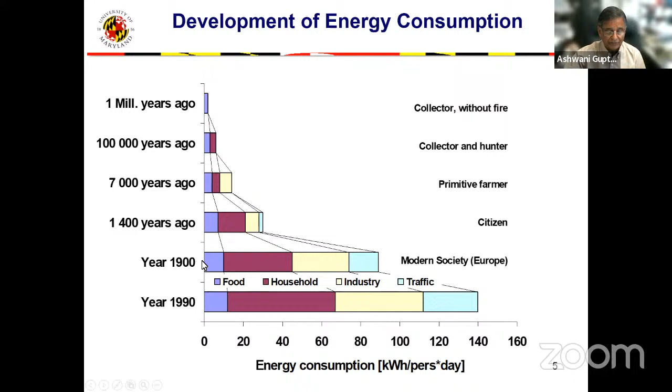So 1990, that's the latest which is available. You can see everything seems to grow, not only for the food area, but also the household industry, and the traffic continues to grow, starting with only a few kilowatt hours per day to almost 140, 150 kilowatt hours per day. So it's growing, which means we need to meet the demand in the various sectors. We can't switch just one sector here to the next sector. So we need to satisfy.

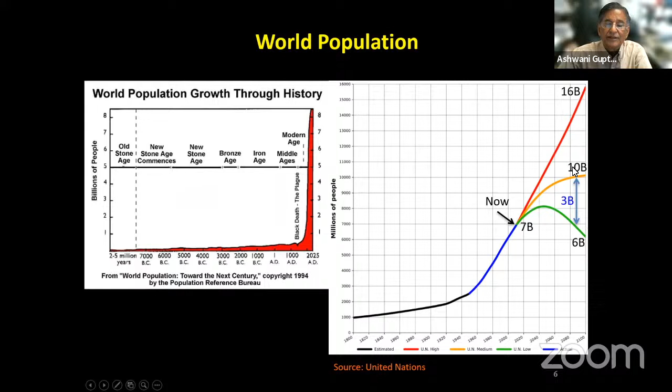So here's a close view of the number of population, where we are and where we're going—roughly 7-8 billion right now. And if the economical scenario stays the same way as we see it, we can see a high trend of going to about 16 billion. On the other hand, the low part maybe about 6 billion, and the medium path is about 10 billion. So given the recent trend, the population continues to grow, and we expect this to grow all the way to about 10 billion by the end of this century, about 2100.

So population is growing, the energy usage is growing, which means we need to bring the energy, and this is where contribution from various researchers, including Professor Yap in Malaysia, is very, very helpful in satisfying the need of the society and the human being to make life comfortable.

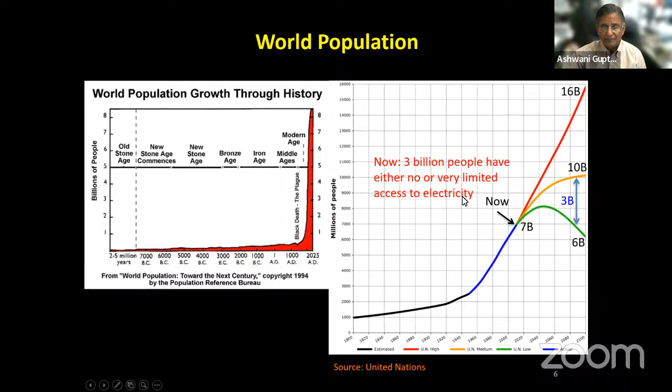So right now, there are about 3 billion people who have either no electricity or very limited access to electricity. I really believe electricity is a very integral part of society, and we need to have availability of electricity for everybody. If you go to countries like Africa, the only thing they wish is that they had electricity, could turn it on, cook the food, have a comfortable life. It will change their life dramatically from what they encounter right now.

So world population currently requires food and fuel supply designed for about 7 billion people. Over the next 50 years, we expect this, as shown in the previous graph, to reach roughly 10.5 billion people worldwide. If you look at the distribution from 1800 to 2100, you can see the developed countries have a relatively small increase in population—a small finite increase—but the developing countries, this is where the major growth will be.

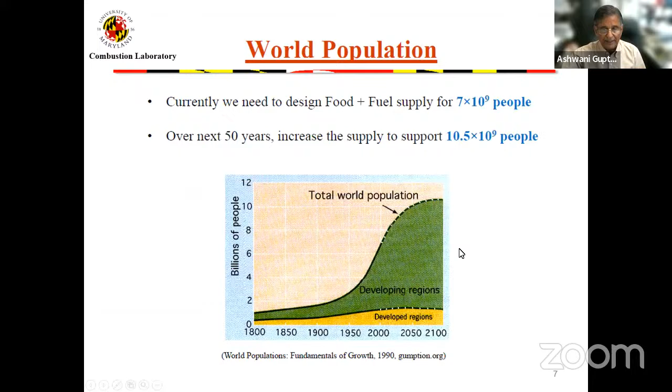Remember the point I made about electricity demand in Africa and some developing countries—this is where the big wish, the big need is for providing electricity for everybody. So the availability of energy, as well as electricity, is not uniform to where we need to see it.

So if you look at the Industrial Revolution, going back in the old time, the horse was our major carrier, and this is not too long ago—just even 1800, you could see horse buggies transporting from A to B.

Where I am, at the University of Maryland, I show the campus where it was. Back in the old time, people used to travel from Baltimore, which is about 25 miles north of College Park where I am, and they'll go to Washington, which is only about 10 miles from College Park. So this was almost a midpoint, not quite, but almost. They'd stop overnight and park the horses near the building and rest, then continue the next day. If somebody is brave, they will continue the journey the same way.

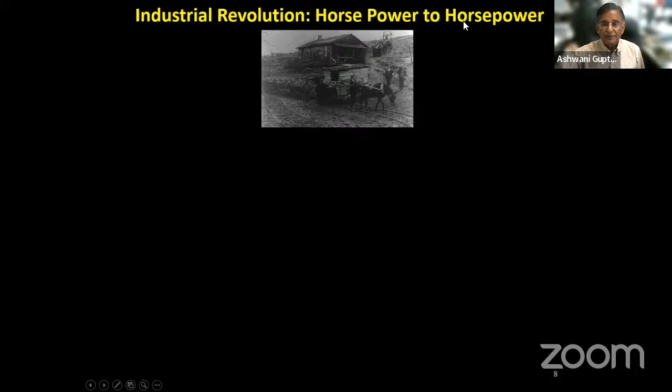So horsepower was the one putting the buggy—a horse is the one pulling it. For those not familiar with horsepower, you can think of manpower: 13 very strong men equal 1 horsepower. That kind of gives you an idea of how much horsepower we're talking about. So horsepower to horsepower is really what we're talking about.

So automobile engine, which we're all familiar with, you can see the automobile over here. I put one of the General Motors cars here, about 300 horsepower. You might say, well, my car is only 200 or 100 horsepower, but that's not the point. I think 1 horse going to about 200 or 300 horsepower, so you can see the order of magnitude, or 2 orders of magnitude increase.

And if you look at the train, from 300 you're talking about 10,000 horsepower, so much larger increase in the power. On the other hand, if you look at the aircraft, and this is the 787, it's 100,000 horsepower. So very, very large increase. In other words, the power which you saw back in the old time with horse and buggies, you can see how much it has increased from 1 to almost 100,000.

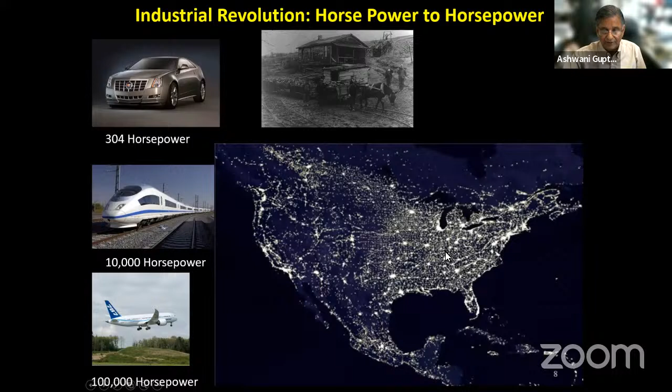And in terms of electricity need, you can see the map over here, and I can share some of the map with how the light is lit up in the rest of the world here. And I'm basically right over here on this corner.

Let me see if I can put the laser pointer here. So I'm right over here, and the eastern part is pretty much lit up, as is the western coast. California, you can see some dots, which is Los Angeles here, San Francisco area, and Las Vegas is just right next to Los Angeles. In other words, the point of the message here is that it's not uniform, and in the northern part you see Canada a little bit lit up.

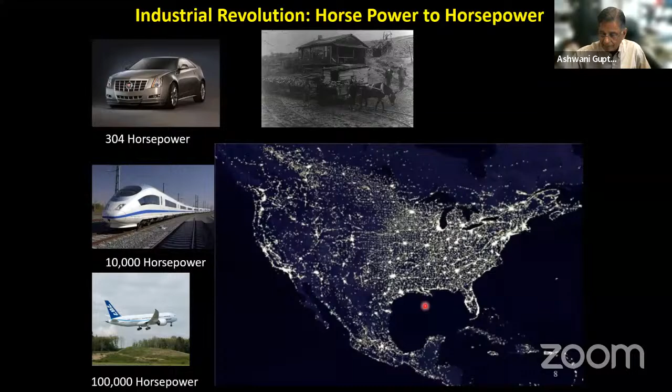So now we come to the feature presentation, which is the high intensity colorless distributed combustion fuel flexibility, something we need to talk about. I was one of the leads in developing this so-called HiTAC technology.

And if you look at how this evolved in the former time, the idea was to make it a bigger and bigger power station. So we have a 50 megawatt power station or 10 megawatt power station. That was the key thing. The goal was how do we actually develop it, and how do we produce the energy from here, and how do we produce the electricity, the electricity production efficiency.

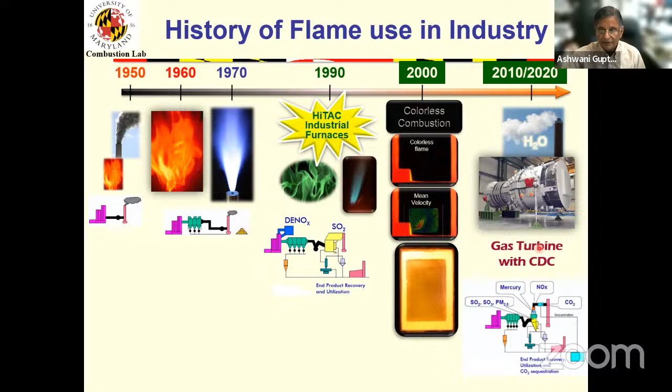So what are the benefits of this HiTAC technology I'm talking about? Some people call it flameless oxidation. Germans call it flameless FLOX burners. I stick to our definition of colorless, because flameless cannot be correct - if you don't have a flame, that means you have no heat and no light. Colorless is more suitable because there's no color, but at the same time you have a flame which is distributed uniformly all over the combustion.

One guy from Italy, who was working in the area of soot particle diagnostics, came up with the idea of calling it mild combustion, which I don't support because it's not a moderate intensity - it's basically distributed combustion. But as you can see, the Germans, the US, the UK, and many other countries have used it, including far east countries like Thailand.

So the technology actually provided significant energy benefits and energy savings in industrial furnaces. Our goal was to have energy savings of about 30%, and I'll show you how much we were able to achieve, as well as the CO2 reduction.

There's also uniform thermal field distribution in the entire combustion zone. I'll show you the actual results. Basically, throughout the entire combustion zone, you can have a temperature within about 30 degrees K. This is unheard of, because in the literature or any combustion book you look at, the flame goes from normal room temperature all the way to about 2000 degrees K.

Here we are talking about the entire combustion zone, from the start of the burner to the end, staying within 30 degrees K. There's also low noise - we've shown almost 7 dB noise reduction. In fact, in some cases, you can't even tell whether the flame is there or not. So that's very favorable too.

Very high heat flux - those in computer modeling will see the typical value they use is about 100 to 120 kilowatts per square meter. Here we had a measured value as much as 3 times as much.

So high intensity CDC, which is more megawatts per cubic meter, and that's really where our gas turbine combustion becomes very, very useful.

So we transitioned from industrial furnaces to gas turbine combustion. We also looked at some of the waste, how do we convert waste into useful hydrogen-rich syngas. We've been using this HiTAC to convert waste into hydrogen-rich syngas. Hydrogen is a premium fuel, so we can clean it up to get hydrogen fuel itself - I call that fuel reforming, because you take any hydrocarbon material and actually convert it to hydrogen fuel.

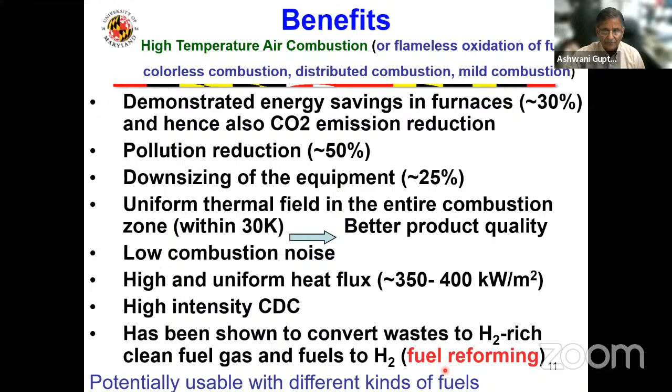So potentially it's usable for different kinds of fuels, and I'll show you some data using different kinds of fuel. Very, very attractive proposition, what we see here.

This is more of the detail, the concept of how it's used here. For industrial furnaces, typical application is less than a megawatt per cubic meter atmosphere. I bring up the atmosphere because that gives applicability across all kinds of application - power application as well as propulsion application. For furnace application, the typical value may be of the order of 0.1 to 0.2 megawatts per cubic meter. On the high end, maybe 0.5 megawatts per cubic meter.

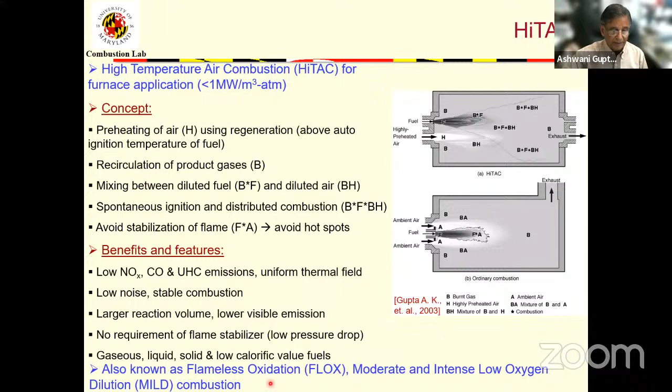As I mentioned, some people call it flameless oxidation, or in German, moderate and intense low oxygen dilution, and mild combustion. The name is attractive, but it's a misleading definition. I would not use 'mild' because it's not mild—there's no real boundary to what we're talking about here.

You can go down to as low as a few percent oxygen concentration. That means you're able to recirculate even the exhaust gases of an industrial furnace back in, and you can still have a flame. It may not be visible, but it's still heat releasing.

On the other hand, looking at syngas, synthetic gas of very low BTU, you can actually burn this in the HiTAC furnace and still get heat release. So it becomes a wide, open area.

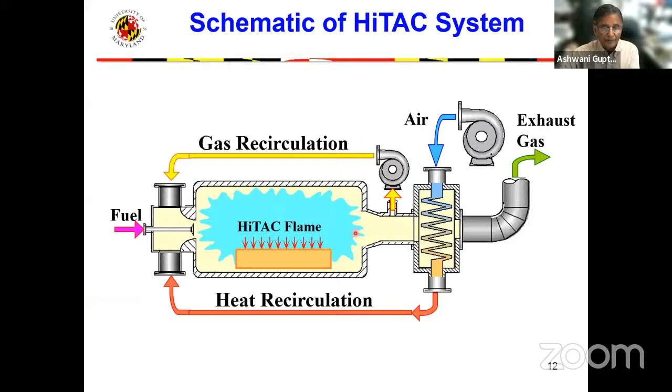How do we do this? Basically through gas recirculation and heat recirculation, which I showed in the initial picture—heat recirculation and gas recirculation bring us to this part here.

This is the one which actually led people in the community to call me Mr. Green Flame. So if you hear 'green flame,' that originated from the University of Maryland—that's where the name comes from, from much higher temperature combined with reducing the oxygen concentration.

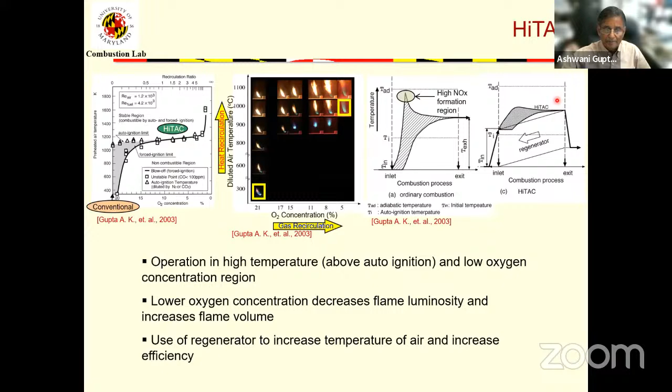On the other hand, we use regeneration at very high temperature and dilute the gases to reach the HiTAC region on the right-hand side. These are the detailed features you see here.

Colorless distributed combustion, or green combustion, is a very novel technology that provides significantly lower pollution—I'll show how low. That includes NOx emission, CO emission, no emission of particulates, no soot emission, no carbon emission, as well as no hydrocarbon emission. The flame thermal uniformity is also much more uniform in distributed combustion, and because of the energy saving, I'm putting less fuel in.

I'm also getting the CO2 reduction in this case. Distributed combustion is featured by controlled mixing of the reactants, where I could have steam to reduce CO2, or nitrogen, or even steam to reduce the emission. So fuel flexibility means that I can use different kinds of fuels, and irrespective of fuel property, I still see the same thing in this case.

So here, in terms of an academic exercise, I'm looking at the turbulence as well as the length scale relative to the laminar flame thickness. The wrinkled flame zone is here, the thickened reaction zone is over here, and the distributed combustion is somewhere in this vicinity, where the Damkohler number is less than 1. The reciprocal of the Damkohler number, the Karlovitz number, is somewhere in that vicinity, so the thickened reaction zone is in that region. The normal spot, with very low Karlovitz number on the order of 1, is more true for the IC engine. You can see the onset or hotspot zone, which gives you high emissions and also unstable combustion. So you see the global feature, and in this region here is the laminar flame.

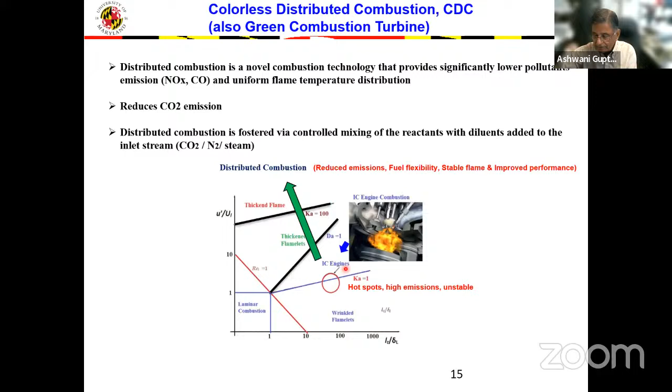So if you look at the Damkohler number, as I mentioned, in the previous case it's about 1, or the inverse of the Damkohler number, the Karlovitz number, is very high. So the Damkohler number is about 1, and this is where the high-temperature air combustion regime sits. On the other hand, colorless distributed combustion, which is more for gas turbine applications, has a pretty high Reynolds number. That's where CDC sits. So CDC is not the same as high-temperature air combustion, and vice versa, but there are certain differences. The common feature is still that we don't see the flame.

On the left-hand side is what you physically see in the normal flame. This is looking at the cross-sectional view of a combustor, and you can see the tinted blue zone over here—that's the diffusion zone. When I introduce this in colorless distributed mode, you can see the whole flame color has disappeared. You might say, well, there's a yellowish or orange background—that's actually from the coating on the material that's glowing. But otherwise, there's no visible flame, as you can see here.

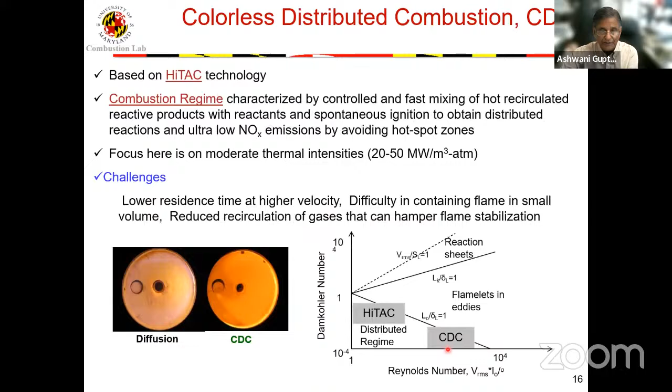So the challenges you see here, when you go to high-temperature air combustion, include low residence time at high velocity, because the velocities are pretty high, meaning we need to control the flame in a small volume. I'll talk about that small volume. Recirculation is important, along with mixing of these gases with the fresh reactants—that's very important. If you don't do this, it's going to impact flame stabilization. So it's all about knowing how we prepare the mixture. If you don't prepare the mixture properly, especially in high-intensity applications, that becomes a very challenging task.

So we started this work in our lab to look at what CDC looks like.

Our quest was to look at colorless distributed combustion, the University of Maryland near-zero emission, fuel-flexible approach, meaning I've used it for different kinds of fuel and still don't see any emission using CDC.

In this example, you see the whole range of combustors here, and the common feature is that we had the facility in which I can introduce the reactants from upstream or downstream, and the exhaust gases exit over here.

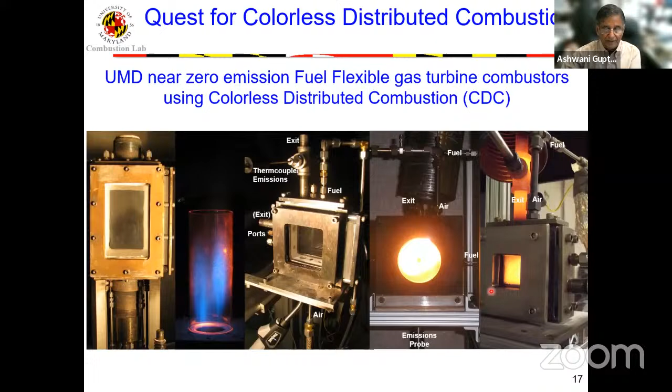That's the picture I showed you, and this one is very high intensity on the right-hand side. You can see the size dimensions going from this volume to about this size, so moving in the right direction to have high intensity and very uniform conditions, with the oxide gases exhausted away.

Basically, gas turbine is what we're using for the CDC, and the goal is to reduce emissions. What strategy can we use, what are the important factors for CDC design, and what has been done in the literature? I'll show you some sample results.

This was obtained in some earlier work at about 0.1 megawatt per cubic meter atmosphere, going to low thermal intensity. In other words, moving toward gas turbines, which are high intensity: 5 megawatt, 28 megawatt, 85 megawatt, and all the way to 200 megawatt per cubic meter atmosphere.

As I mentioned, modern gas turbine applications used for power generation at present are limited to about 15 megawatt per cubic meter. So you can see I am an order of magnitude larger than what is used in current practice for electricity generation.

You might ask how this compares with aircraft. Modern aircraft can go all the way to about 50 megawatt per cubic meter atmosphere, so even compared to modern aircraft, I'm about 3 to 4 times higher than what they have.

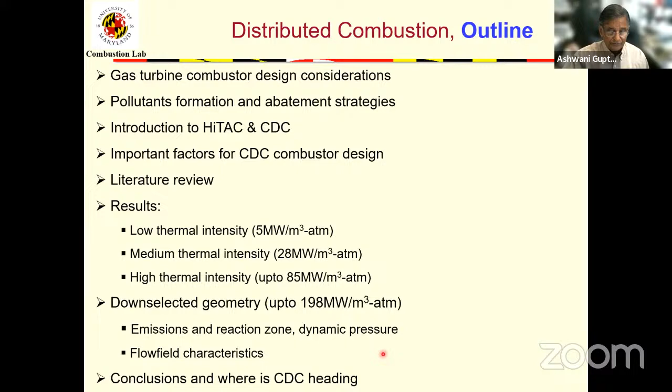A little background on gas turbine combustor design: the design consideration basically requires low emission and very high thermal intensity. As I mentioned, for stationary power application it's 15 to 20 megawatt, and the residence time is 20 milliseconds.

That's a very important factor. The reference velocity for those working in that area is typically about 60 to 70 meters per second. We need very stable combustion, and of course, noise levels below combustion instability.

That's important because that's what gives rise to oscillation, pressure oscillation. We also need low pressure drop, typically less than about 5%, and wide stability limits, with a turn-down ratio of 5:1 for low power to high power. The pattern factor, how uniform it is, is also important for gas turbine application.

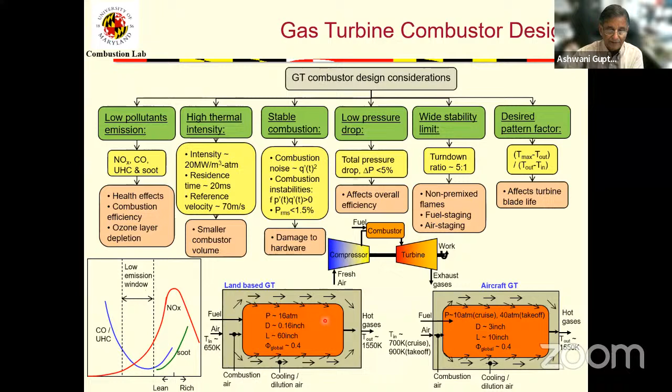In the actual schematic given here, fresh air comes into the compressor, that goes to the combustor, and then to the turbine, which is the output. So it's open-ended in this part here, both for the aircraft as well as the stationary gas turbine.

So what did we do here? We bring the whole thing to the lab and see what I can do in terms of determining what the factors are where we are seeing it.

How am I doing with the time? Time is okay? Yes, Time Prof. wise? Yeah, yes.

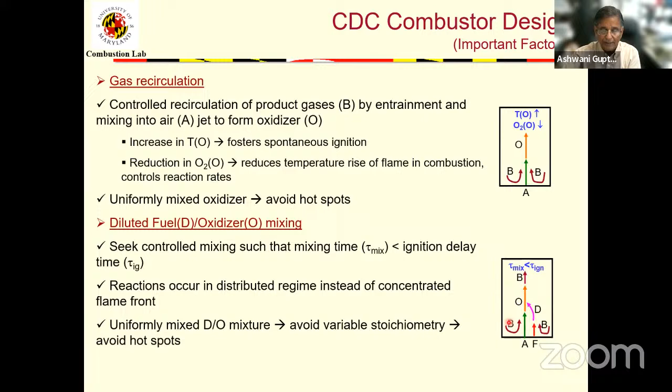So I'm going to dwell on this part here to see what the schematic would be needed and who's done what to achieve the condition we're doing here, because there's no simple relationship.

So here's the same schematic. The air introduced here, burn gases going over here. Now I can take this fuel, either introduce it upstream or impose it in the opposite direction from the burn gases. So in this case, the air is here and the fuel is here, opposite. So FO, fuel is opposite.

In this example, fuel and air are in the same direction, F as fuel, on the same side of this combustor. And in this example, the fuel and air are pre-mixed. What happens if I pre-mix the fuel and air and then introduce the burn gases here?

On the other hand, I can take the air on the opposite side and inject it with very high velocity, letting the gas entrain in this part. Now I can subdivide this, air coming in from this part, and fuel on the opposite side. So the fuel will be entrained after getting entrained from this section to mix with what I want to achieve here.

On the other hand, I can introduce the fuel somewhere in the middle, in recirculated products with the center part here. So I call this RC, and this is the opposite, reverse opposite, reverse central, and reverse same side over here.

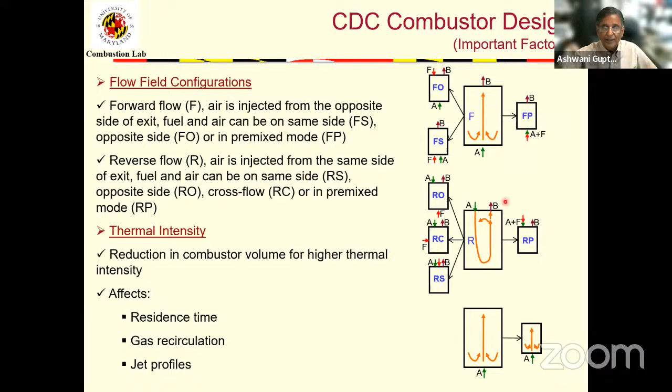Or I can have the reverse in the premix case, where the fuel and air premix and go in the loop. So I had the different schematics, getting the opposite picture here. Essentially, the idea was to look at the matrix and see which one gives the low emission, because that's really our goal. These are the factors we need to obtain in designing this whole thing.

So here's the results for the furnace application, given in thermal intensity. Thermal intensity, as I mentioned, is typically about 0.01, 0.05, or 0.1, 0.5 - anything less than 1 megawatt is furnace application, and anything above 10 megawatt is for the gas turbine application.

So you can see the whole range of work which is done, including Roman Weber from International Flame Research Foundation, some of the other work, as well as my own work done back in year 2000, early 2000, and so on. And you can see the industrial application was the one which we were doing it in conjunction with the Japanese. In fact, I was the international consultant to the Japanese project for almost a decade. And this is where all the work evolved here for the furnace application.

And you can see how much the thermal intensity was and who was looking at this, because that was a dynamic activity back then. And these are the corresponding geometries, which you see it labeled over here, who did what, and what kind of configuration which we did, including the work from Georgia Tech, Bobba, and other work which you did, and was central, how much was done.

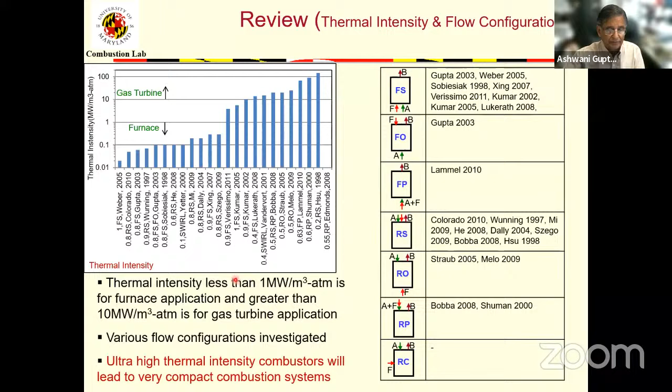So ultra high thermal intensity combustor will lead to very compact combustor. This is what our goal was, to look at the overall configuration. So here's the example of what people did and how much the NOx they were obtained.

So on the left-hand side, you can see where the fuel from the same side, fuel from the opposite side, air from the opposite side. So here the fuel, here the air, same side. And here is the fuel and air from the same side, but it's the reverse direction. In other words, that's the direction which is going in. So here is the air and fuel from the same side, and here the air and fuel, but they are rather separated. So the separation distance is actually very, very important.

And this is what led to, when we probed into a little more in the detail, that the Thring-Newby parameter became very, very important to consider this. And we didn't realize that this was important and how much distance we need to keep.

But the bottom line is that the studies which you see it, much of the studies were at atmospheric pressure, because that was our goal, and to apply it for the furnace application. And you can see the heat load was only about 500 kilowatt, or 20 kilowatt in our case, and 50 kilowatt in our case.

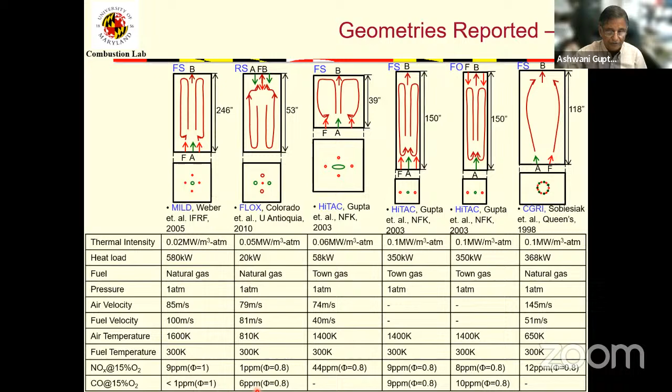And incidentally, 10 ppm, you might think it's a high number compared to what other people have got. In fact, we got even smaller than this, but that's just to say, what it reveals is that the geometry, configuration, how you introduce the fuel and air are important bearings on what the NOx emission you're going to see it. So you can have anywhere from 1 to 10 ppm of CO level in different configuration.

There's more of the similar kind of data with the other investigators all around the world, which they did. And you can see much of the data is atmospheric pressure and the air velocity going from 20 meter all the way to 100 meter per second. And the fuel is atmospheric temperature, air is atmospheric temperature.

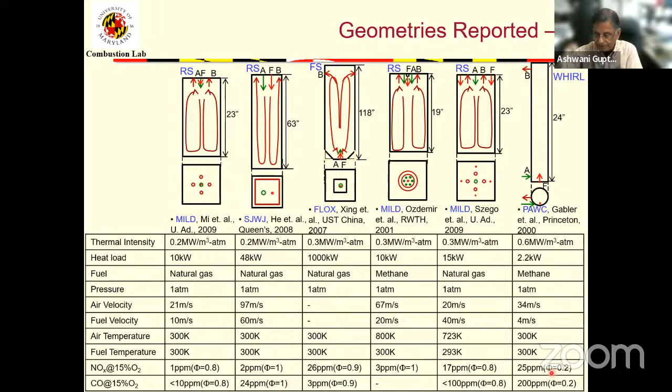And the NOx level, you can see the equivalence ratio, even at stoichiometric mixture or near to stoichiometric, you begin to see you can achieve 1 or 2 ppm. And CO level 10 to 20 ppm. That was a very, very high achievement, which was never demonstrated before in the history of burning of the fuel, which you see it here.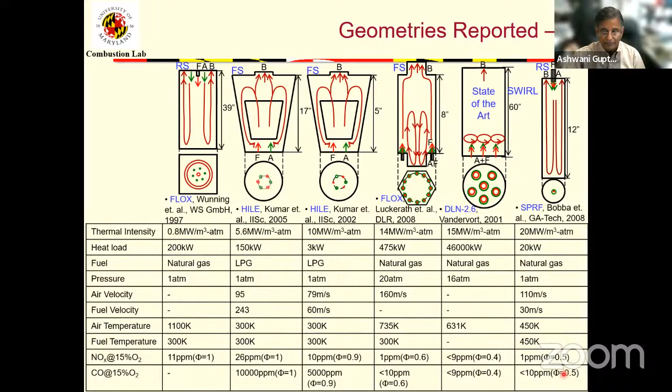So that gives the very favorable condition to where we need to go. Some more geometries here, practical application, reaching the condition where you can get the NOx level anywhere from 1 or 2 ppm going all the way to 30, 40 ppm, along with the CO level. So it was a major, major achievement.

NETL, National Energy Technology Laboratory in the US, did this, and they were actually able to show that you can get sub-unity ppm NOx level.

AFRL, again in the US, and Technion and NETL in the US, worked on what was more of the rich quick burn, lean burn, and trap vortex combustor. They thought that was a good way forward to reduce the NOx level, but you can see the NOx levels were pretty high, 40 ppm, and CO levels were still 10 ppm.

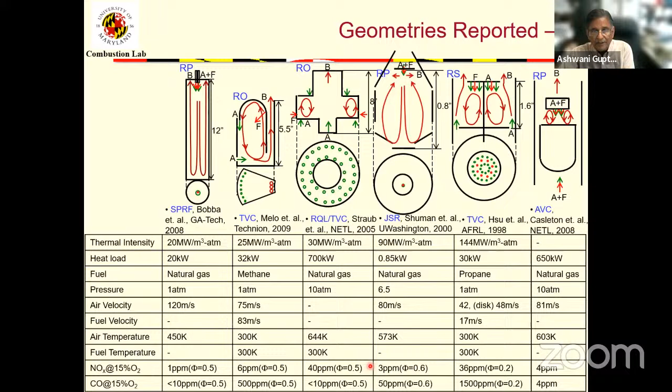So that was the dynamics of where we go. This is a summary of the different configurations, which we summarize in a nice way: forward same side, forward in the opposite direction, for fuel and air. In the premix case, this is what you get.

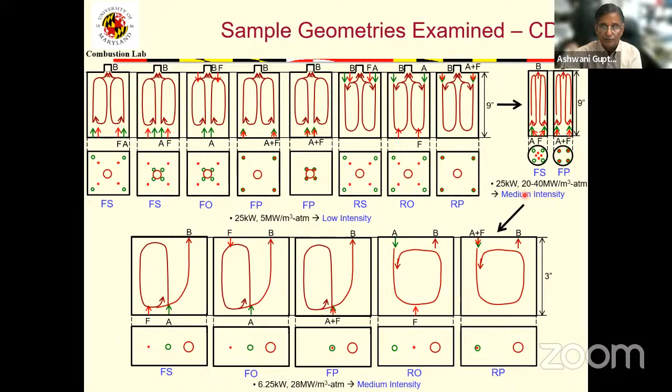We did some CFD simulation to see what exactly it looks like. Unfortunately, I don't have time to show all the data, but nevertheless, we configured something that can go from low intensity to moderate intensity to very, very high intensity, 20 to 40 megawatts per cubic meter.

You can see the NOx level going from 4 ppm down to about 1 ppm at an equivalence ratio of 0.5. You might ask, what does 4 or 5 ppm actually represent?

Remember, I said that the gas turbine combustor in stationary power applications typically has an overall equivalence ratio of about 0.35 at normal setting. So even richer than what's normally used, you were able to see the NOx level at about 4 or 1 ppm.

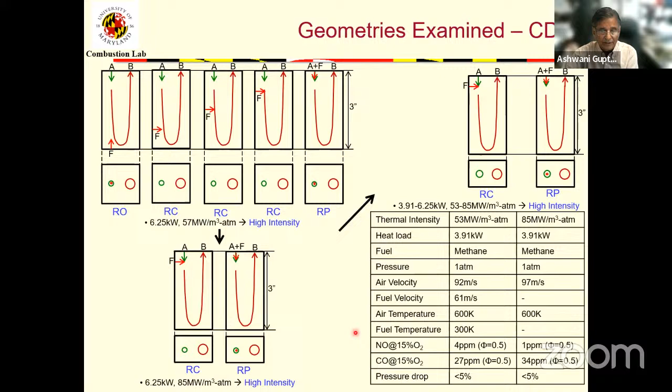That was actually very good, and these are different kinds of fuels. I didn't go into what kind of fuel you're using, but we've been using methane, propane, and some of the syngas which we're producing here.

So this is basically a summary of our University of Maryland results, some sample results you see here. We did all the way from 5 megawatts per cubic meter atmosphere all the way to about 200 megawatts per cubic meter atmosphere, and you can see our thermal intensity results and how much emission you see here.

You can see the NOx emission in some cases as much as 10 to 12 ppm. In other cases, we're seeing the NOx level in only single digits, 1, 2, or 3 ppm. The configuration determines what is low and what is high.

On the other hand, the CO emission in most cases is about 10, 20 ppm, and in some cases as low as 4, 5 ppm. This was a major, major discovery in terms of how we actually reduce emissions. And of course, soot and carbon didn't exist, and hydrocarbons didn't exist in any of the features we're presenting here.

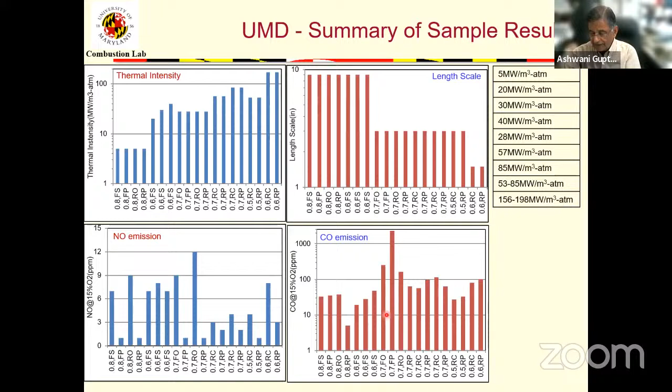So I'll go into some more detailed effects you see here: the effect of air and fuel injection, what diameter we need to have. That gives the way and means of how we inject it.

You can see at an equivalence ratio as much as 0.9, essentially stoichiometric condition, having a NOx level at 15% O2 down to about 6, 7 ppm. That was a major, major achievement.

You can actually even reduce it further at 0.9 equivalence ratio, near stoichiometric, with NOx levels as low as 5 or 6 ppm. Same thing with CO at equivalence ratio 0.7, which isn't quite what's needed in the gas turbine combustor, but people wish they could go as high as 0.7. The reason they don't go to 0.7 or 0.6 is because the NOx levels and CO levels are pretty high.

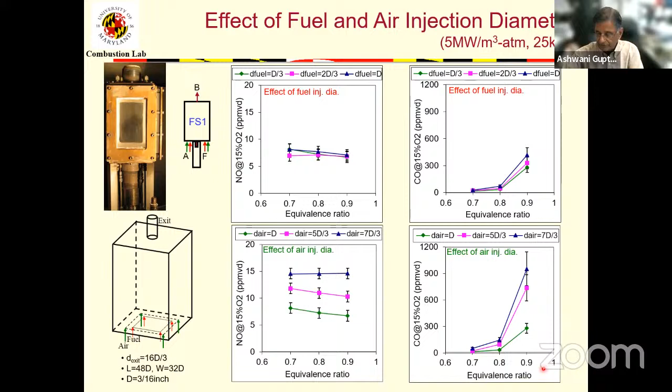In our case, we are reducing it to a much lower level here. These are some of the features you see here. We even examined some of the pilot flame conditions having a thermal intensity of 6 kilowatts and thermal intensity of 200 megawatts. That's the combustor which I showed earlier to visualize what we're really getting at.

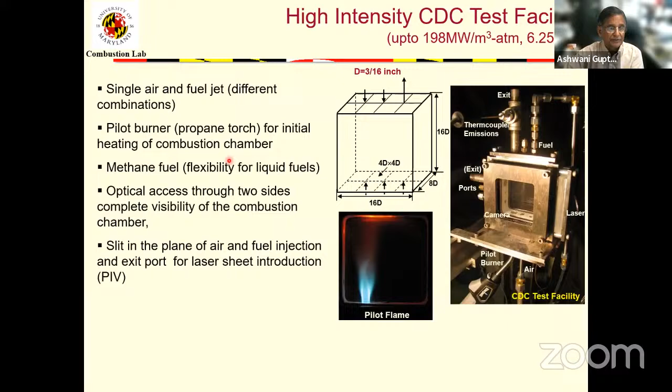So we examined this using PIV, particle image velocimetry, to see how the flow field looks like. Is the flame actually distributed or not distributed? Is it colorless, distributed or some kind of other mode, using methane as fuel, but we also used liquid fuel as propane fuel, gaseous fuel which are in liquid form at high pressure conditions. And in all cases, the NOx levels were pretty low.

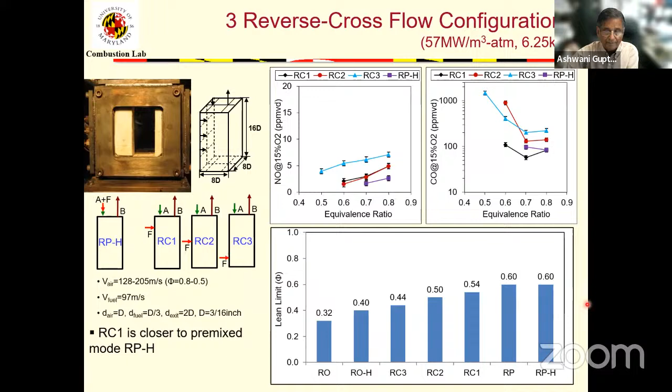So that gives the results you see here. You can see the NOx level at even higher equivalence ratio conditions, of the order of about 1 or 2 ppm, and in some cases reaching about 3 or 4 ppm, with CO emission lower too. And of course you can extend the lean limit, if you have the pilot flame, to about 0.3 or even less than that. You can achieve it in many cases.

So here's the swirl combustor. We took motion footage, because the gas turbine combustor is basically a cylindrical chamber, and you can see the motion in tangential entry. And here you see... somehow the movie is not working.

I had the movie clip here. Okay, it doesn't want to play.

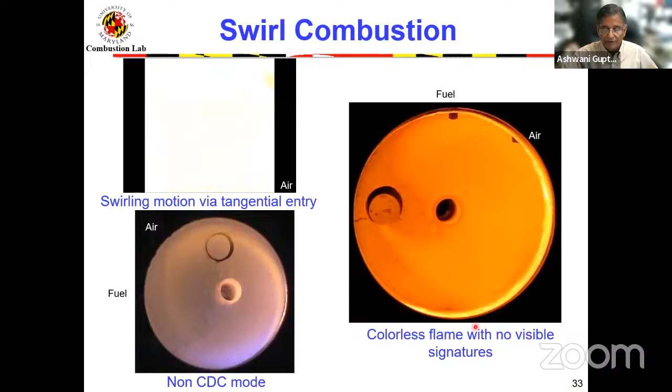I just wanted to show the swirling motion, how that looks like here. In non-CDC mode, you can see the evolution of the flame, and it gradually goes around and sits around the periphery of the combustor. And when you see the distributed flame, the flame is actually going very closely when you watch, but visibly you could not see any flame in the cross-sectional view of the combustor here.

So these are the NOx emission levels, further tuning it. Now you see even more favorable results, that even at a very high equivalence ratio of 0.7, 0.8, you begin to see the NOx level at less than 1 ppm. In fact, that's the limit where even the NOx analyzer won't be able to show what is what. The CO level is very, very low, only a few ppm. So this is a very highly favorable configuration which one can use for industrial application, with very low NOx levels.

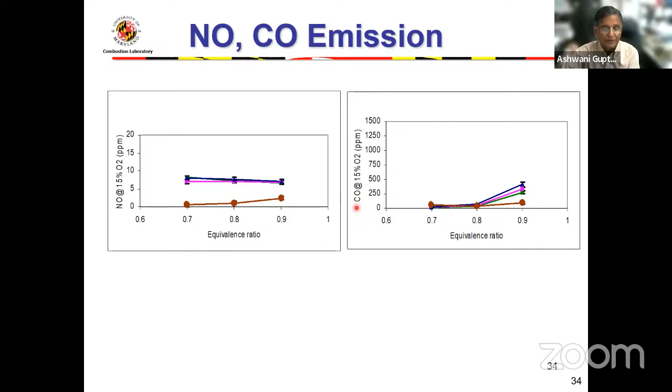So where do we stand in terms of actual emissions? The EPA limit for anything more than 250 megawatts is 15 ppm for the NOx level. You can see the 15 ppm level here, and our combustor going from 5 megawatts all the way to 170 megawatts, without fine tuning, in every single case we're able to show that without any dilution and without any mixing further downstream, we're able to meet the requirement with no problem at all.

On the other hand, if we look at different examples here, we can show that the limit you can achieve in some cases is as low as 1 ppm, even at close to 30 megawatts. That was very favorable. Single digit NOx demonstrated, and every design gave NOx levels for the premix case less than 3 ppm, and of course CO levels less than 100 ppm.

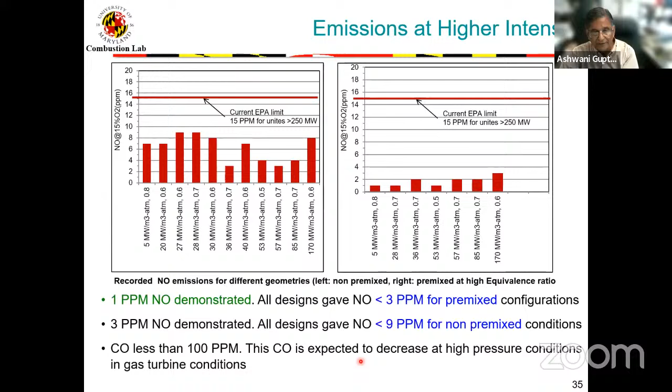On the other hand, if we inject water, which was one way to reduce the NOx level, and many companies use this device to control it, you can reduce the emission from this level down to this level by injecting water or steam. People use lean premix combustion, and you can see the NOx level drop from the lean premix combustor to this device here. So given all the engine companies compared to ours, we are way, way down compared to what's available today. We believe this is a very favorable way of reducing NOx emission.

I haven't talked much about the CO2 emission, but if anybody is interested, I can give some of the sample numbers, not the data, but the sample numbers where we can get to and how much reduction we are seeing. Typically we can get about 15-20% CO2 reduction.

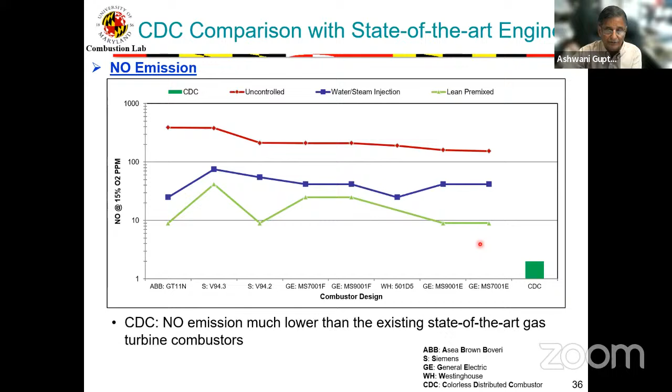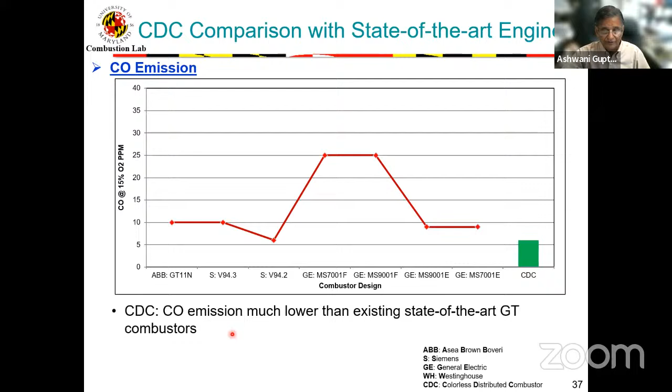And there's the CO reduction. You can see that in every case, compared to what's available, we are much lower than state-of-the-art CO emission in every single case here. So I'm going to say a few words about the hydrogen-enriched fuel CDC, because hydrogen is becoming more and more important, and I thought it'll be appropriate to see what that is.

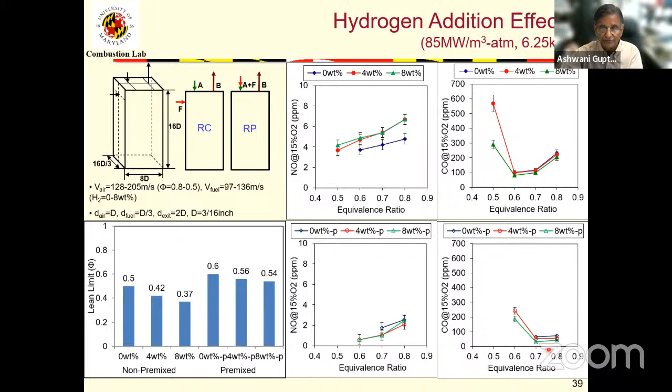We did the hydrogen enrichment with different fuels. Hydrogen is added to methane in this case, in some cases propane. And you can see that even with the hydrogen addition, I'm seeing 3 or 4 ppm. If I tune it further, I can go down to about 1 or 2 ppm in every case. So the CO reduction goes down to about 10 ppm.

So that's very favorable. In terms of using hydrogen enrichment for distributed combustion, basically hydrogen will enhance the stability. It will give you high efficiency and high performance and very low emission because hydrogen is a very good fuel. And it also gives fuel flexibility, so I can use different kinds of fuel which are otherwise harder to burn.

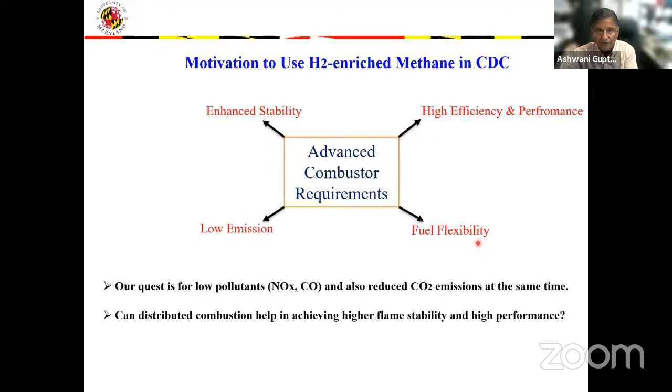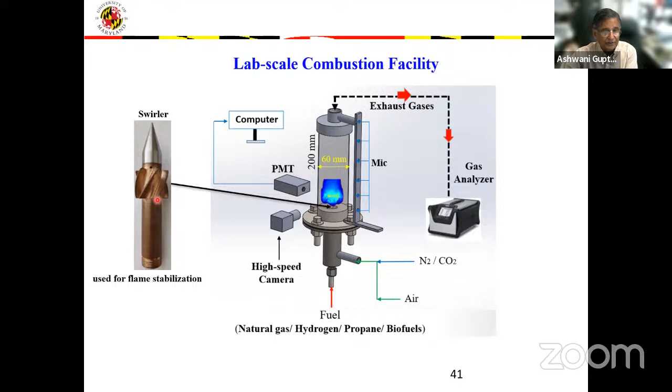We use the same combustor, lab scale combustor, and here's an example of what we see here. I won't show all the data, but this is a swirler, what you see here. In this case, our goal is to achieve distributed combustion. So we see the normal flame here and normal combustion flame.

You can see very sharp gradients in intensity, luminosity, and the scale. You see color scale on the right-hand side, and that's the boundary of the flame envelope. As you approach toward distributed combustion, you can see the entire volume of the flame is filled up at this condition here. And if you look at the RMS values of fluctuation, it's actually going down as you approach the CDC.

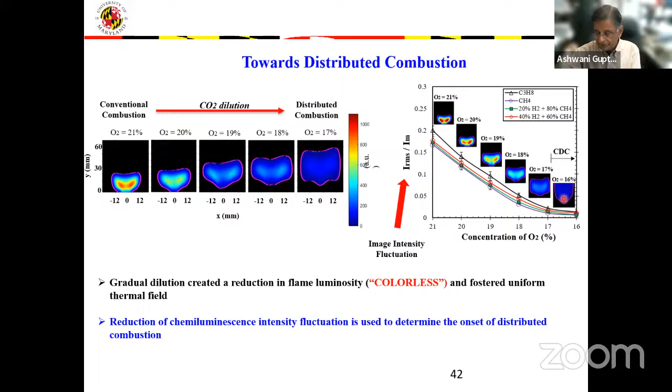So for CDC, root mean square values of the fluctuation are actually decreasing. This is very important in terms of colorless distributed combustion. So here's the conventional flame, here's the distributed flame. You can see that the vortex which forms over here is what contributes to instability, whereas in the stable uniform case, we see the absence of these boundaries.

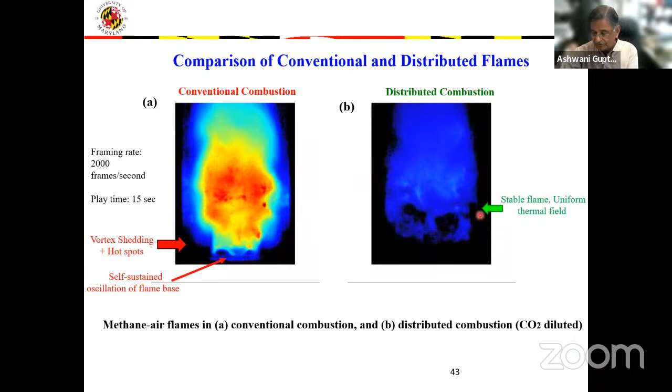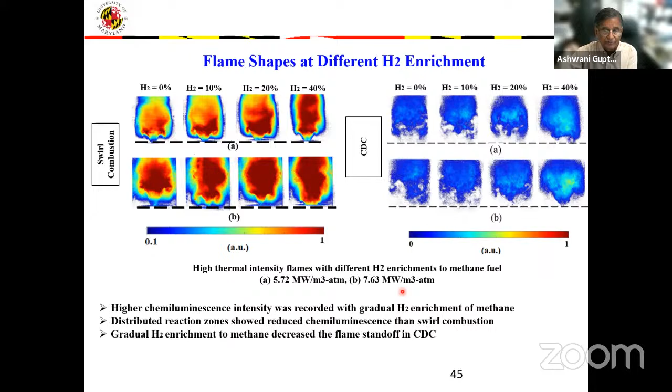On the right-hand side, you see the flame visualization, how that occurs, for a flame with thermal intensity of 5 megawatts to about 7 megawatts, very uniform. You can see the CDC flame speed and normal swirl flame, which you see at 40%. So you can see the distribution.

On the right-hand side you see the effect of how much the flame temperature matters. In the CDC, we actually preheat the air rather than room temperature, all the way to 300 degrees C air preheat. You can see the adiabatic flame temperature go up, which is as we expect, but at the same time, the NOx level doesn't go up.

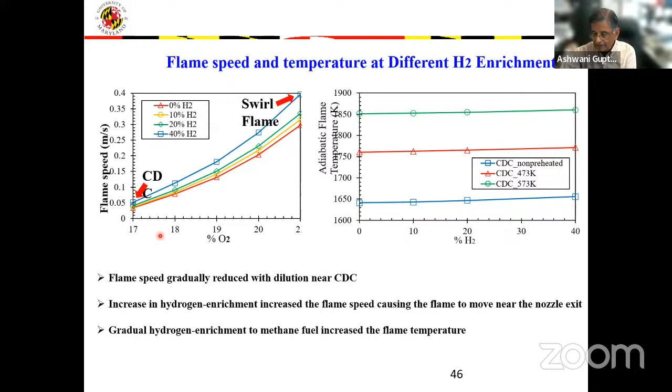We did a bit more proper orthogonal decomposition for one sample case of 10% hydrogen enrichment for the 5 megawatt case. You can see that the distribution and the peak, which you see it, is actually disappearing. In the normal flame we see it; in the CDC we're actually dissipating it.

So these are the different modes which you see, the zero mode and time constant with the values. We see the disappearance in the various cases. Again, the previous one was for 5 megawatt, and same thing for the 7 megawatt, pretty much the same features here. This is more going towards how do we actually apply this to machine learning and artificial intelligence, and this is where we're heading to, looking at the same pictures.

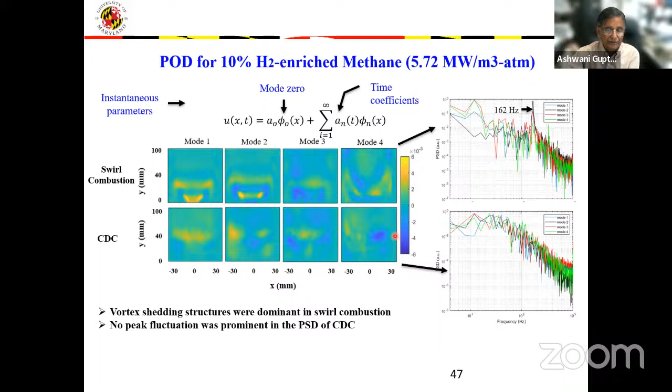So this actually gives us a means to alleviate these oscillation frequencies, and understand what's the mechanism which is occurring. In the CDC case, you don't see any of these peaks which you see otherwise in normal swirl combustion—they disappear.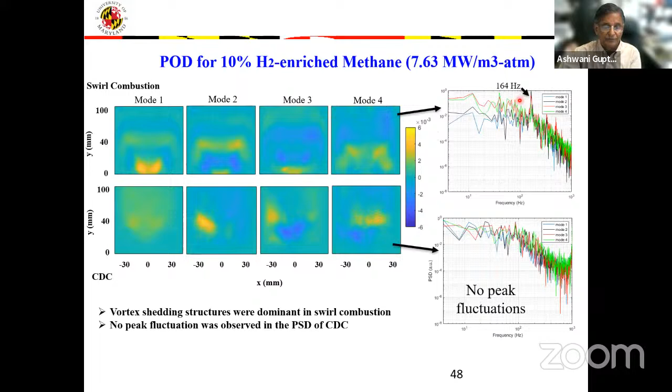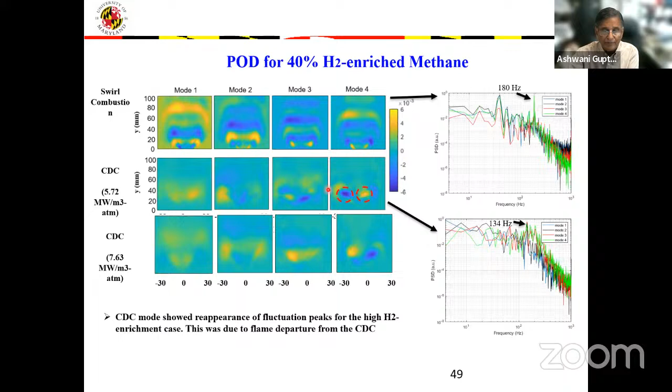More in the same case, basically the CDC, you don't see any peak, and in the other case as well, combustion, we see the peak at 164, at 10% hydrogen enrichment. That's the last example, which I'm going to show, pretty much the same example. You see the peak frequency showing up at a discrete frequency, 180, and these are the modes which go down to much lower values when you see this disappearance, and that's more favorable.

So the emission reduction characteristics, you can see the CO emission in the normal case over here, and in the distributed combustion, very low emission. And of course, CO2 emission is also reduced.

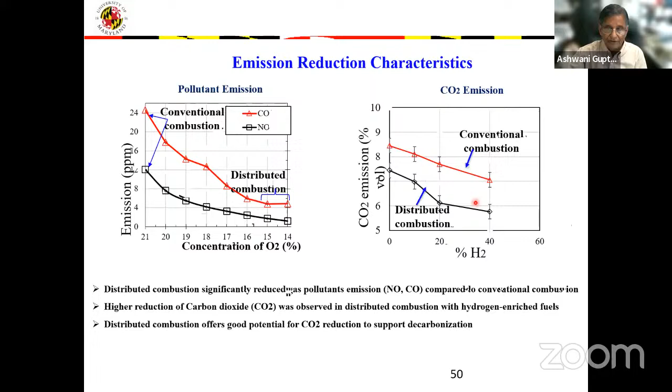And we actually calculated some of the CO2, how much you see it. You can see a significant reduction in the case of distributed combustion, even with the hydrogen enrichment going from no hydrogen enrichment to 40% hydrogen enrichment. This is a large amount of CO2 reduction, calculated value, which you see from these examples here.

So much of this you'll see in one of our books, actually the only book available on the topic, so-called high temperature air combustion, that was written by former Professor Tsuji from Japan, myself, and some other Japanese colleagues, because I was involved heavily with the Japanese project.

And you can see the wide application of the CDC, not just for industrial furnaces. They have heating applications and gas turbines. I showed you some examples which we're doing right now, and the heating application goes over here.

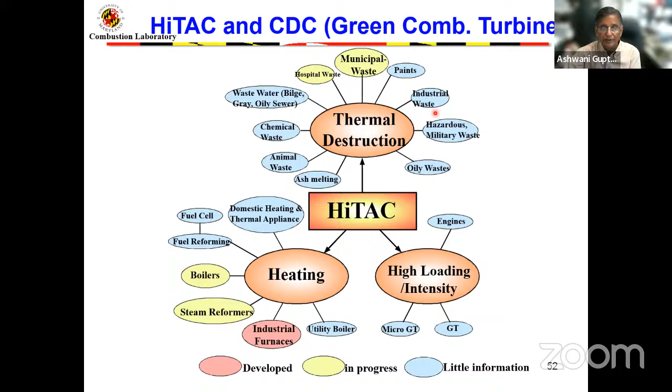And you can actually take care of much of the thermal destruction using different kinds of waste - chemical waste, oily waste, hospital waste, municipal solid waste, and all kinds of things. You can take care of the HiTAC technologies over here.

And this is probably the last example I'll show you - some of the reforming, which one of the major companies in Japan has used and is continuing to use for producing hydrogen from hydrocarbon fuel, in which case you get the exit gases and separate out the CO from the hydrogen to get clean hydrogen.

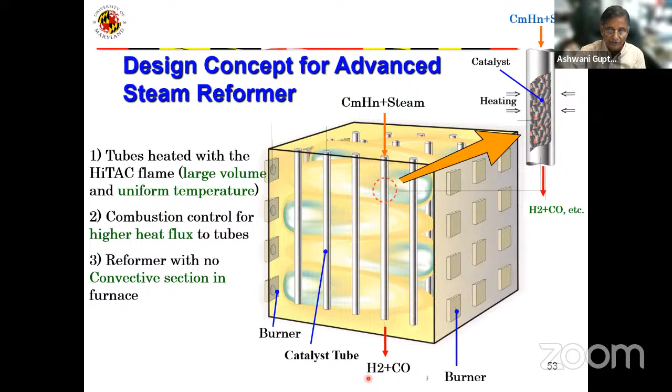So the normal conventional burner and the HiTAC burner, which is flameless, has no color.

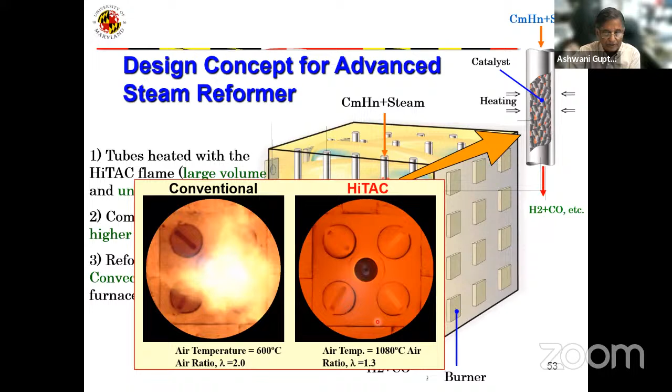So where do we go next? We are actually using this for microturbines, portable power generation, microscale combustion, which is more in aircraft applications, thrust vector control for vehicles. And of course, fuel reforming is an important one.

And acid gas removal from H2S, which is important for natural gas phase extraction. And we're doing some of this to produce biofuel, liquid fuel.

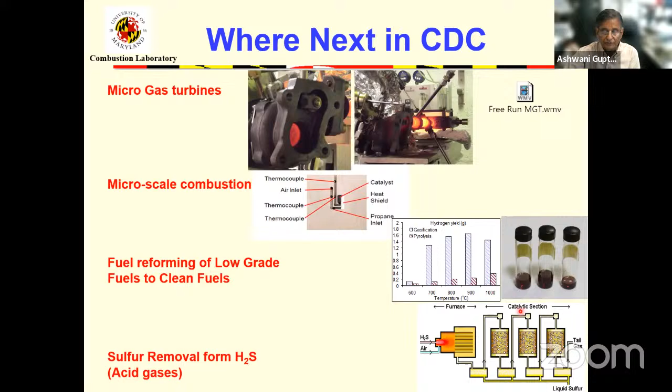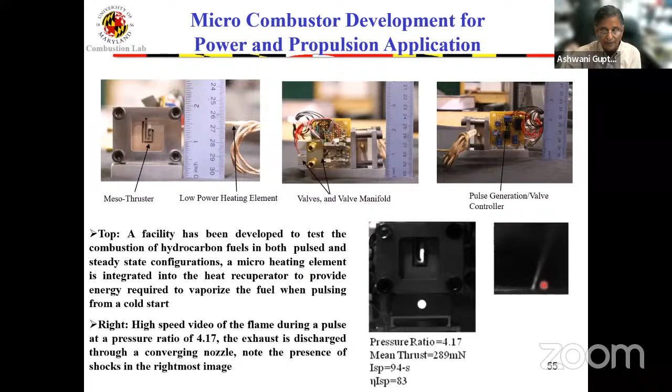And other applications. So these are some of the developments, which is the microcombustor thrust vector control. You can see the simple thrust vector that actually steers the vehicle the way you want it to go - a very, very useful application, more for non-military application.

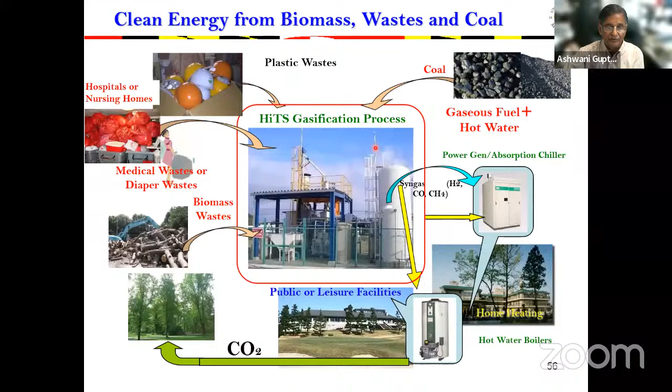So this is just the last example, shown in this picture here, in which the high temperature steam gasification technology is used, wherein we take different kinds of waste, introduce it here, and generate syngas, which is used for power and home heating applications, using any kind of waste, in the overall scheme here.

So finally, to conclude, we demonstrated basically near zero - I call it near zero because 1 ppm is almost like zero. In some cases, even as low as 0.8, 0.7 ppm, from thermal intensities all the way up to 200 megawatts, with CO emission very, very low.

And we produce hydrogen from methane and other hydrocarbons, which I haven't shown here, but you can actually use this high-tech technology to produce hydrogen.

And of course, the sulfur recovery, which I showed in a couple of examples before, that's the Claus process, and that's an important one - very important. So it's used for CDC and power and propulsion applications.

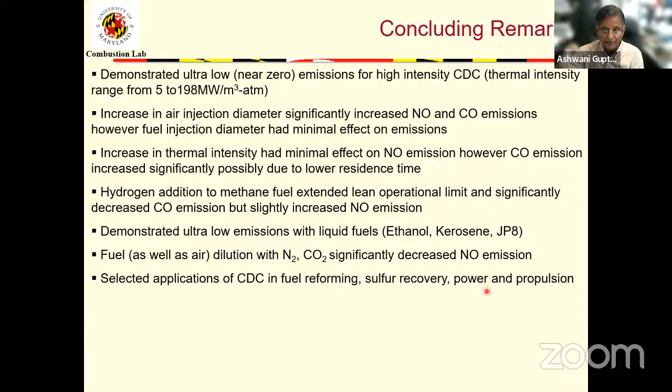Yeah, thank you very much, Professor Gupta. Actually, we have two questions here. Can I just read through? Yeah, we have only about another 10 to 11 minutes left. So the first question actually comes from Ruban Nanda Kumar. The question is, how does high intensity combustion contribute to the overall efficiency and performance of industrial processes?

How does high intensity combustion contribute to the overall efficiency and performance of industrial processes?

Very good question. The theme is really to reduce emissions and enhance performance. I showed you a sample example of CO2 reduction, that's very important. I can share what the worldwide application of high tech has reduced emissions to - it's a tremendous amount of CO2 reduction, which is what we're really after. It doesn't give any carbon emission, particulate emission, soot emission, as well as ultra low emission. That's really the key part here.